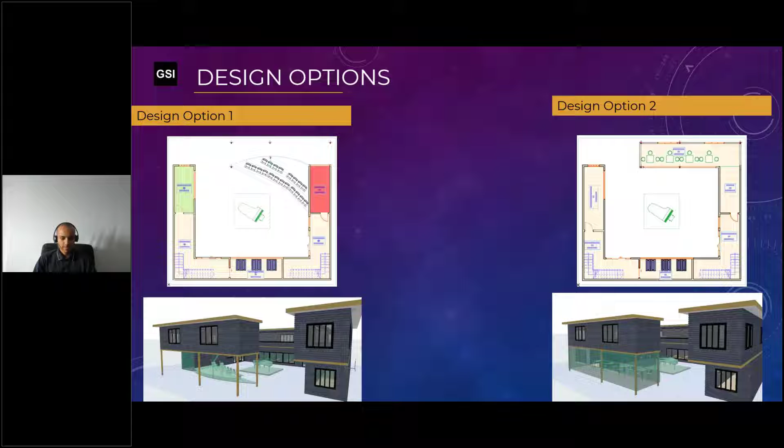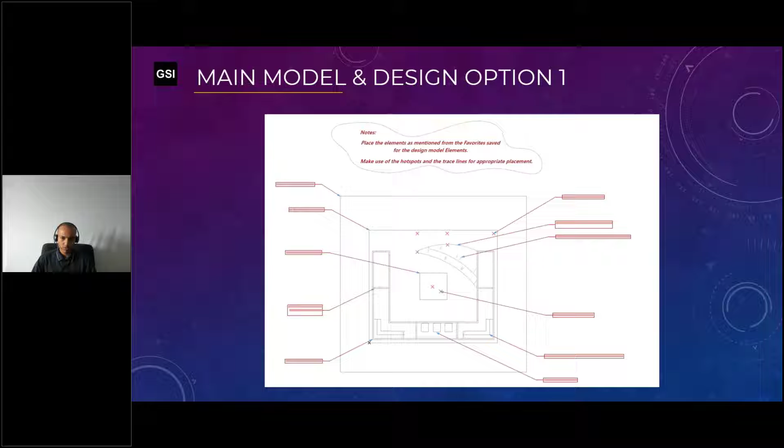With these two design options, we will try to see how to perform those design option sets, assign those elements in the proper design options, and model them one by one. Moving on to the next slide, we have this trace that I created for the webinar. You can see there's a trace option, and I'll now move on to the Graphisoft interface of Archicad.

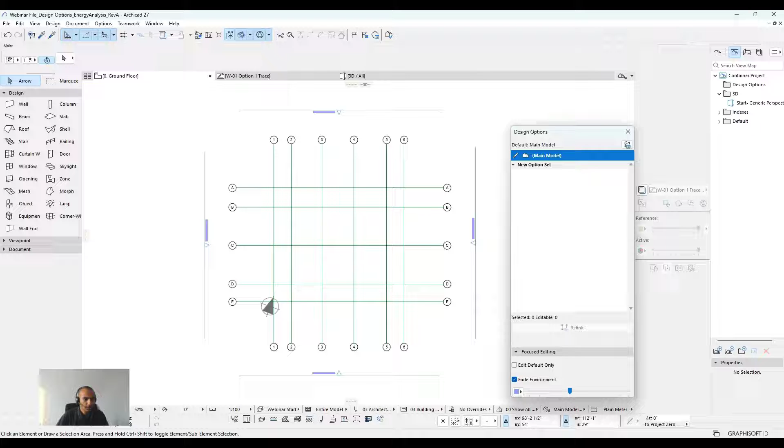So now we are in the Archicad interface. Before we begin, I'd like to show you where the design option palette is. If you go to Window and Palettes, there's the Design Option palette. Click that, and you can adjust it, put it wherever you want.

Once that's done, we'll create the design option combinations and the design option sets. In the combinations, I'll add one: option 1 plus the main model, and another one will be option 2 plus main model.

In the option 1 plus main model combination, we will add option 1, which will be turned on, and option 2 off. But in the option 2 plus main model combination, we'll have option 2 turned on. Once you cycle through those, it cycles over here as well - option 1, and option 2 plus main model, option 2, right? Once that's set, you can press OK.

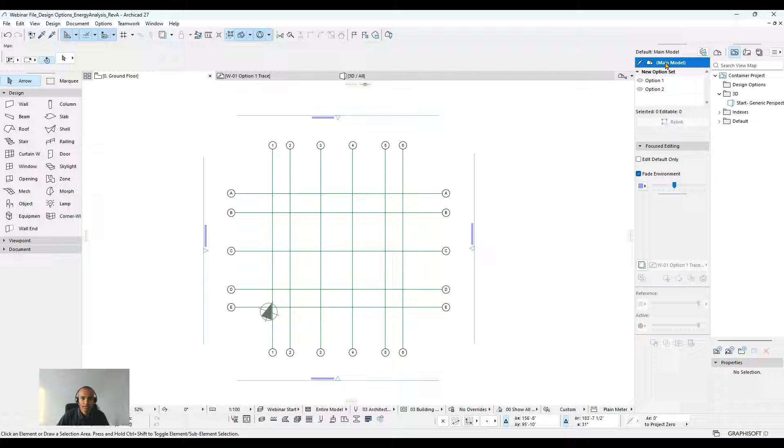For now, we won't be working with option 1 or option 2. We'll just focus on the main model. So I turn these off and put this on the main model. Now I can use...

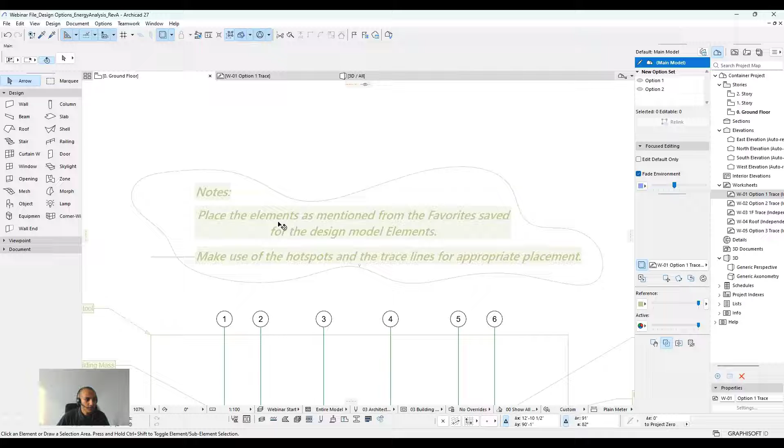...my worksheet where I saved the trace for us to quickly model the building. As you can see, I've put down some notes where I'll be using elements from the favorites saved in this project file, and design the model elements using those favorites. We'll also use the hotspots and trace lines for appropriate placements, which will be quick.

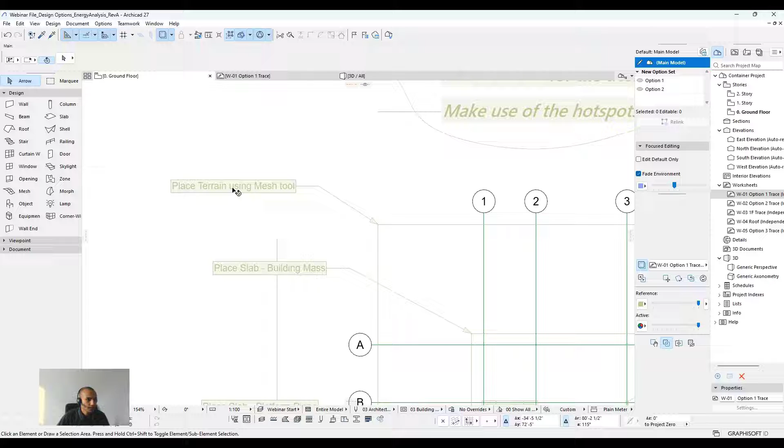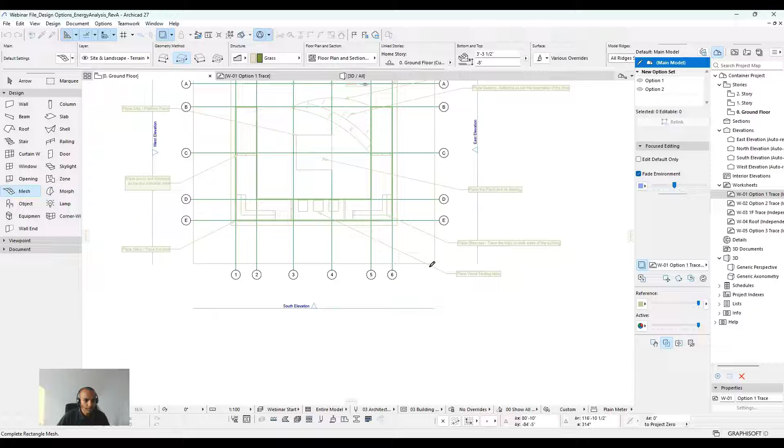So if I start from the terrain here using the mesh tool, which is over here at the Design tab - you can see there's a mesh tool. You click that, and from this dropdown arrow there's the favorites folder. I've set up the webinar terrain, and it will quickly give me the terrain with the settings already set.

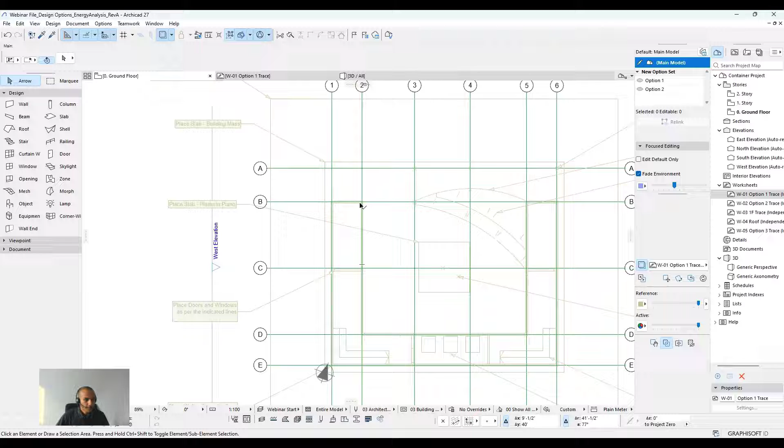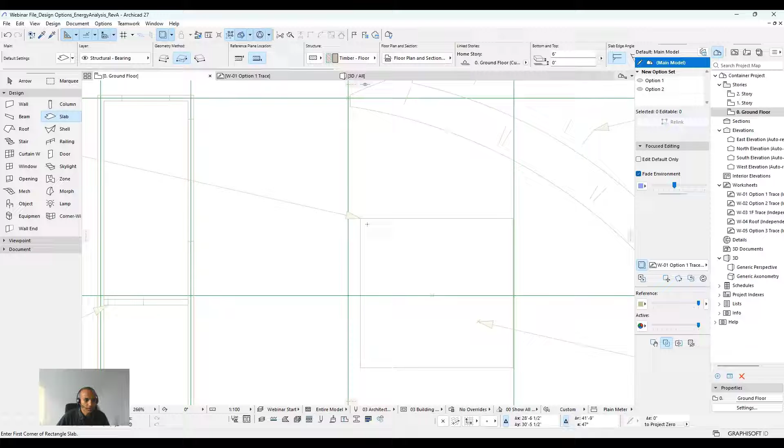So I placed the terrain, placed the slab with the building mass right here, and we'll use the rectangular option again. That's the mesh tool and the slab tool - you can see it's placed really nice. Going back to the ground floor, we'll also put the platform for the piano using the slab tool. Double click that, one click, next click place, go to 3D, check it out. Yeah, it's right there.

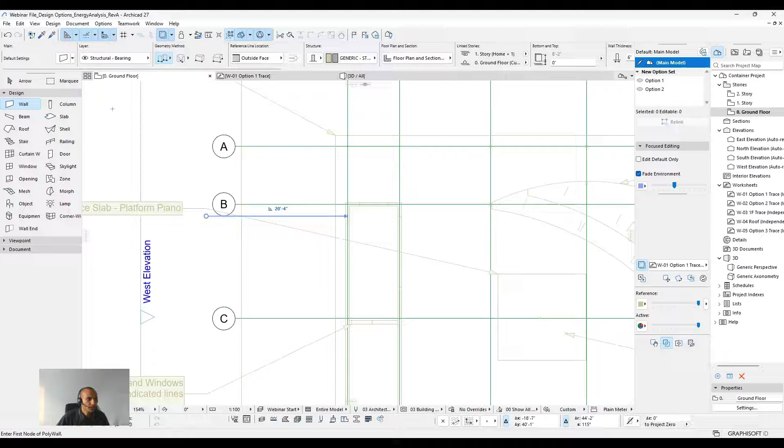Now we will be placing some of these walls. To do that, I'll go to the Wall tab right here and use the wall container to place these exterior walls, one by one.

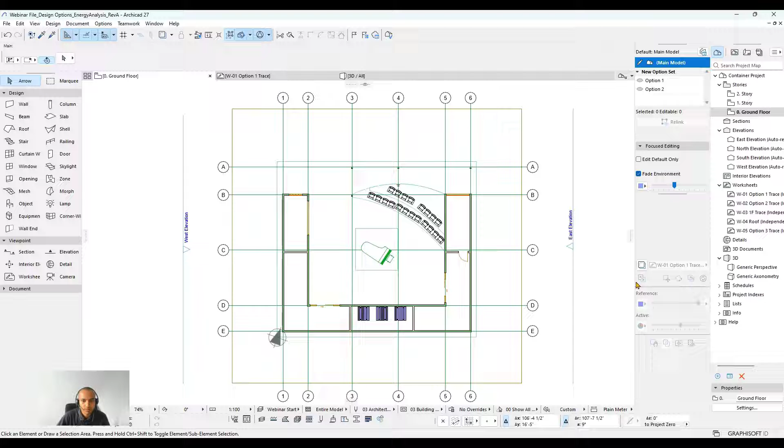And for option 2, we have the other trace map right here, which will be this one. We'll have to first assign the elements to the correct option so that the main model is shifted towards option 1, and we can add more to option 2, right?

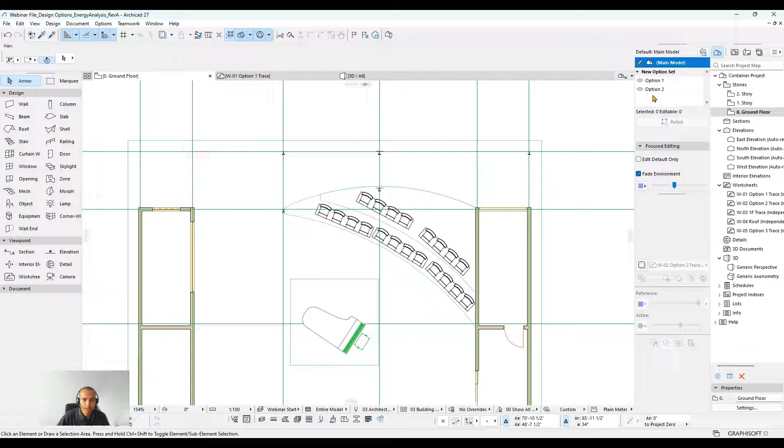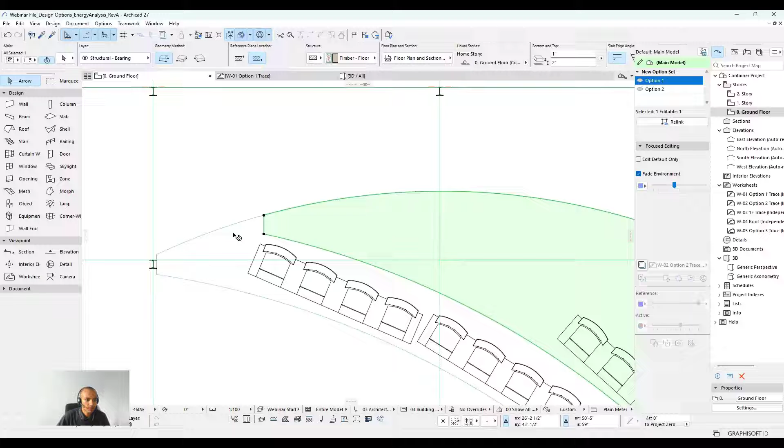So to do that, it's simple - we select option 1 here and get the elements that are going to be in option 1. Such as this, we'll relink to that option right here. We'll relink that to option 1. Relink this, the audience seating, to option 1, and slowly it's going to disappear because we have option 1 powered off.

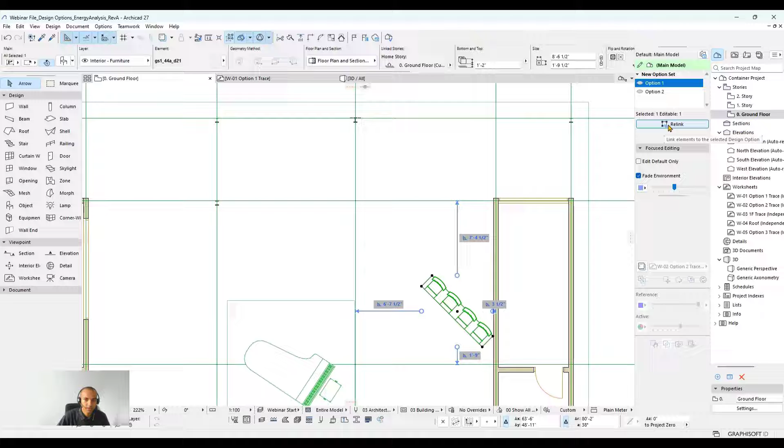The icon is powered off, so the elements are getting hidden while we relink them with option 1. So that's that.

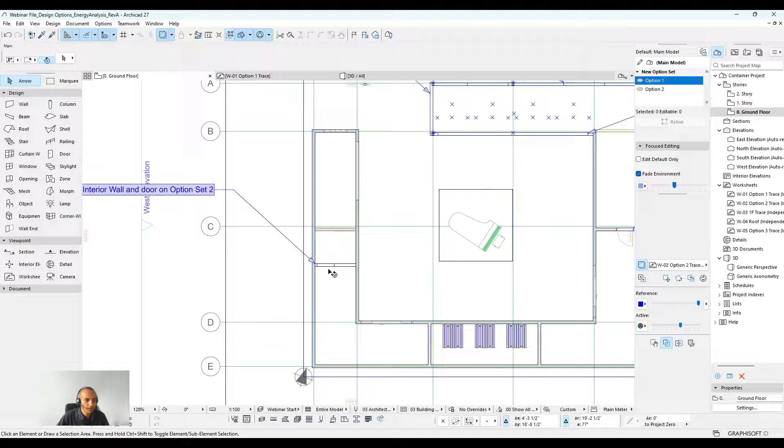Let's hide these and keep these columns there, because in option 2 the columns are there too, so they're going to be on the main model. The only new things we have are this set of walls and the furniture over here. The rest, on the interior side, there's a wall shift towards this side, so that means this is option 1 as well.

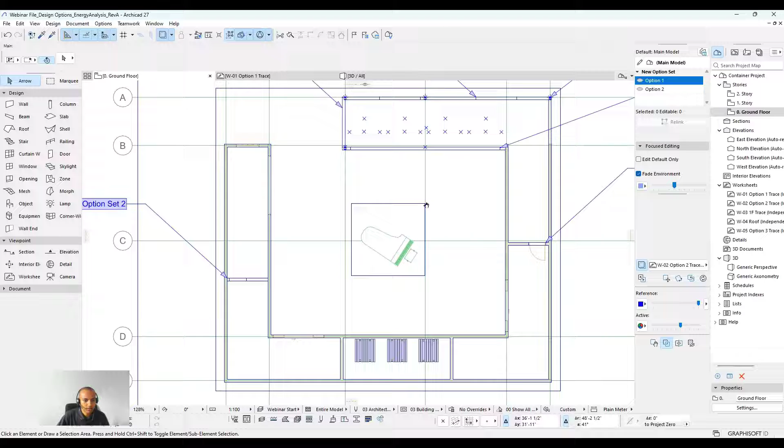And if we check that, this door here will also be in option 1. We have an open space here, so it's that, and everything else is the main model. So now let's put things on the option 2 side.

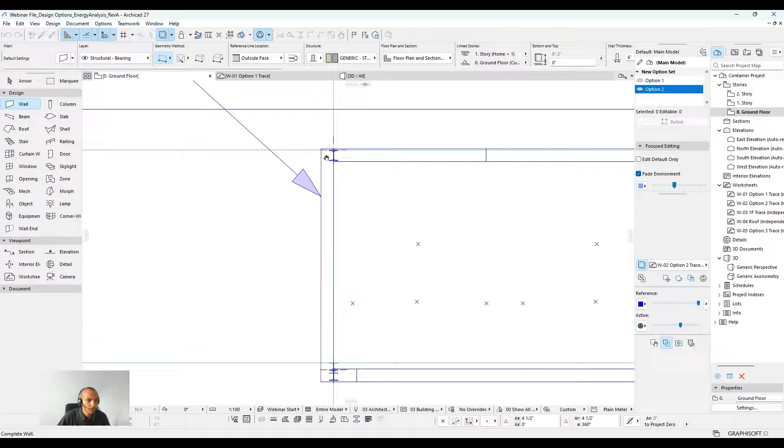On option 2, we have the walls we created with the same wall tool. And as you can see, these walls are going to be in option 2, which is this one. So we highlight this, relink that, it will disappear.

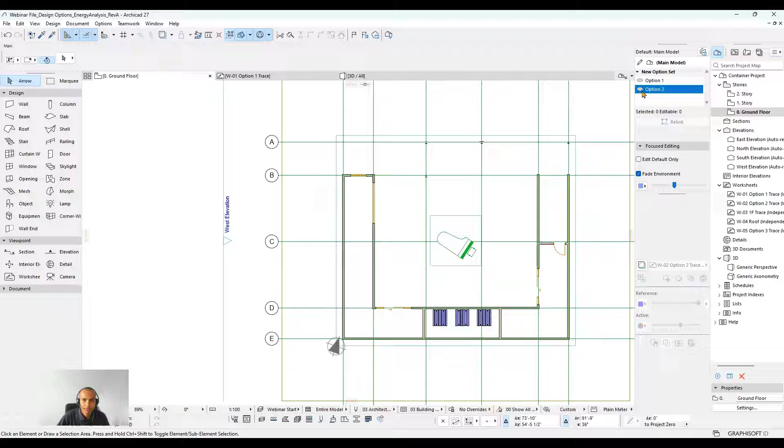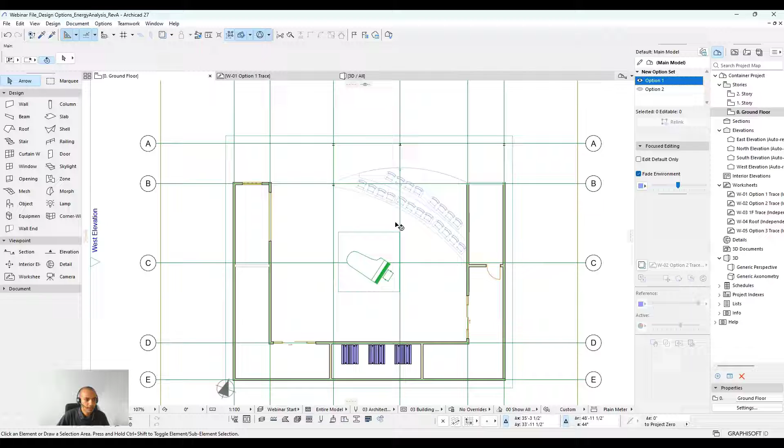As you can see, only the main model is visible because we have turned off option 1 and option 2. So if you start turning them on, you can visualize option 1 right here and option 2 right here. So it sort of changes, and that's how it's done. It's quite easy to fix.

So for option 2, I'm missing this internal wall right here, you can see that. So if I place that and assign it to option 2, it's going to be fixed for the option 2 set.

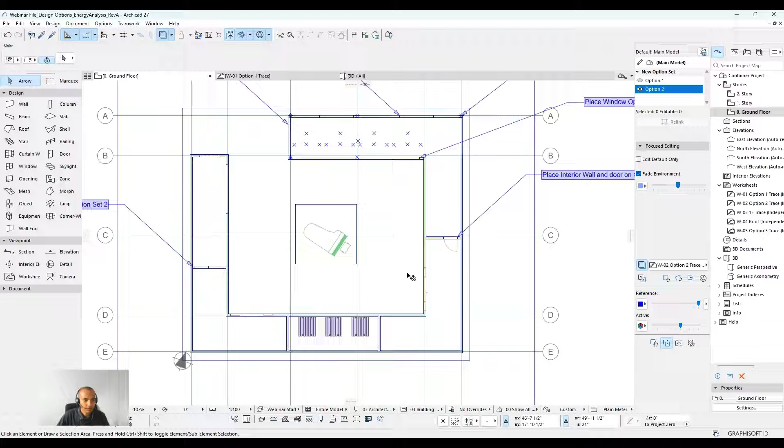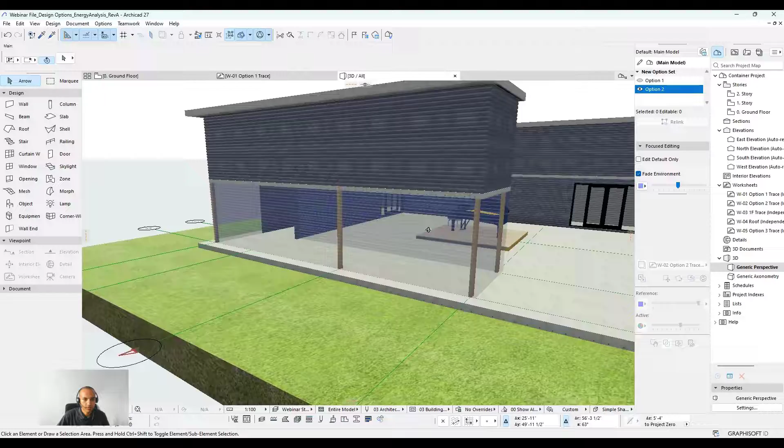And now when we go towards 3D and turn on option 1, you can see the highlighted part. And if we turn on option 2, you can see the walls coming out, right? And it's that simple.

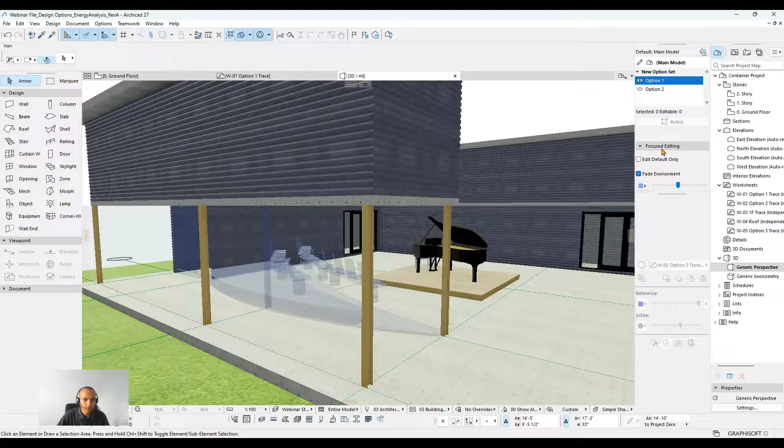So if we try to visualize it in a normal texture, we can use the focused editing settings, which we're also going to talk about in this webinar. So if we use the focused editing settings, we can change this color to the original one so that it will give you the original graphics.

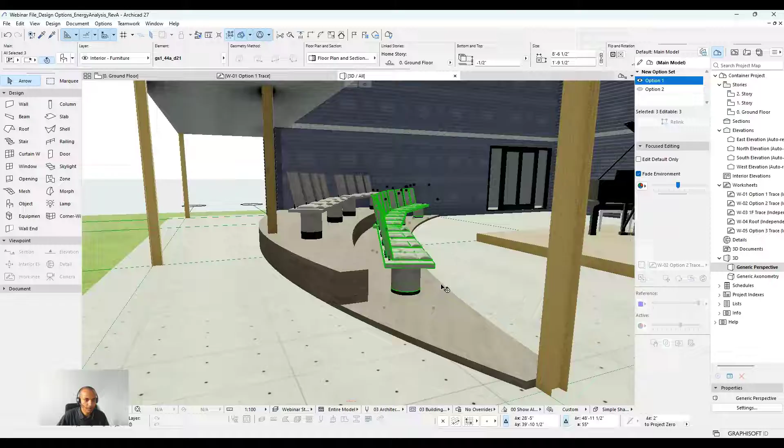And so you can see if we cycle to option 2, it's going to create that wall for us. And here I would want to show and give some time for the design option manager.

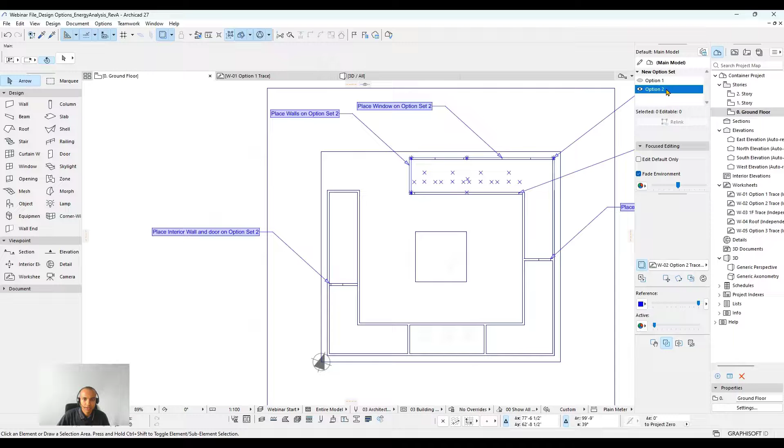So to cycle that, I also have these settings that I would like to show you, sort of saving those views, ground floor views for each option. So, save as view, custom.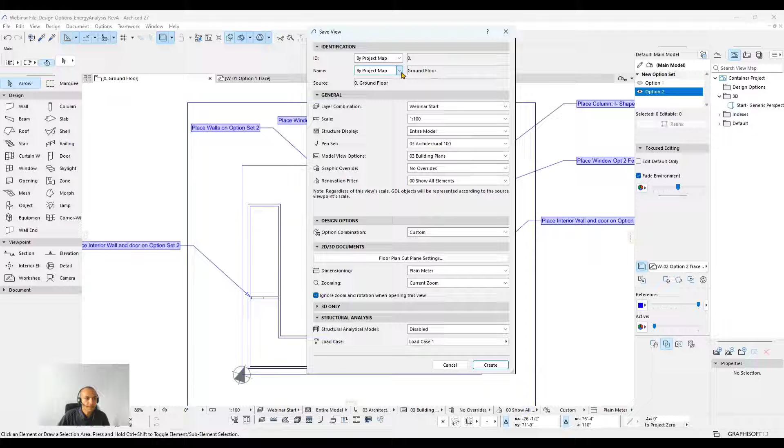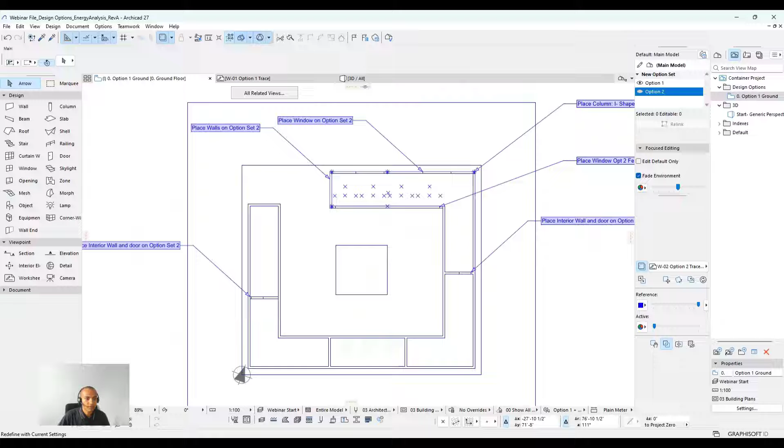So this is going to be option 1, ground. Create that, put it inside the design options. It will house option 1 and the main model. I'll just redefine this, close that.

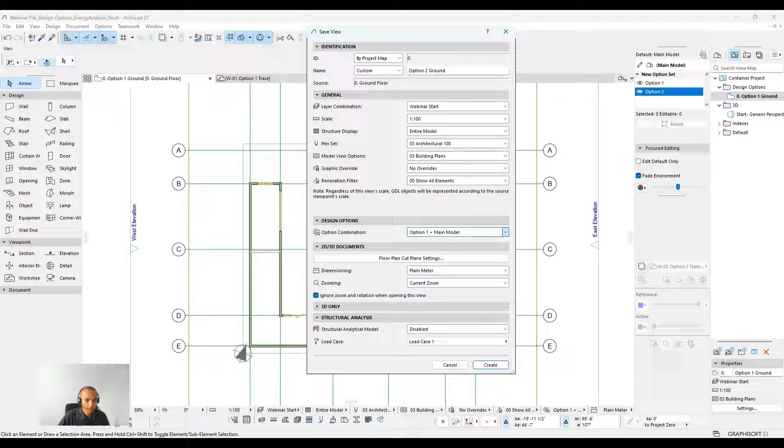And again I'll save a new view, which is going to be option 2 Ground, and we'll keep this as option 2 plus main model. Create that, and we have it over here now.

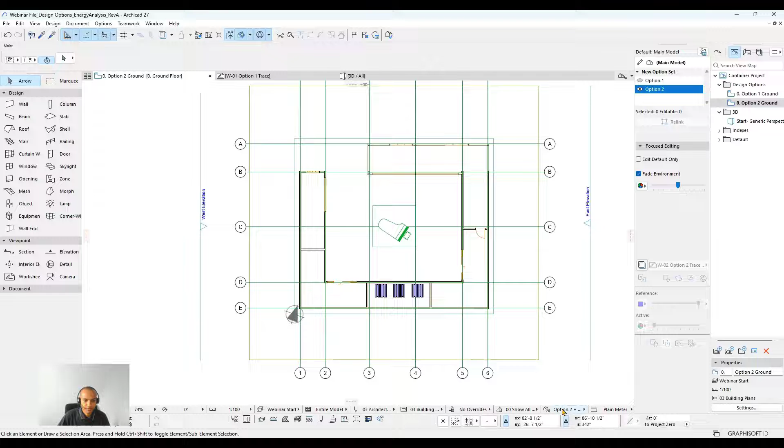So once we created the views, we can cycle through option 1 and option 2 quickly, as you can see. Making use of the design option manager and saving these to the view map will give you a quick overview of your options, option 1, option 2. So there we have it.

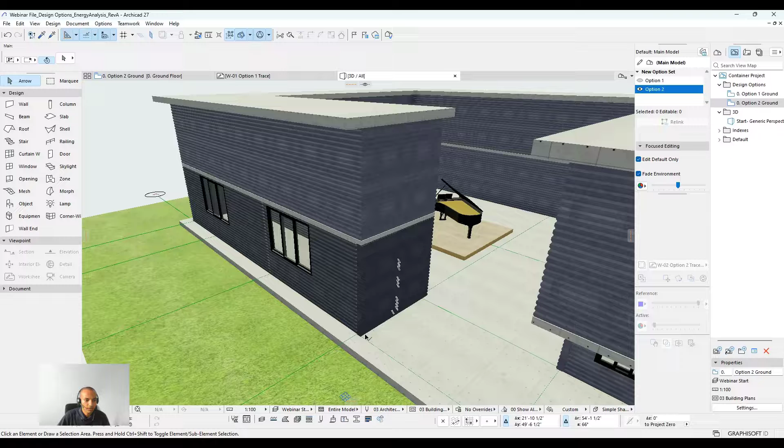That easy. And I would also like to add, on focused editing, there's an option called edit default only. When that's turned on, you are not able to select or edit the elements that belong to option 2, which is highlighted right now. If edit default only is turned off, then you are able to select these elements and edit them. So this is the feature for the focused editing part. If you turn that on and off, you cycle through being able to edit them or not.

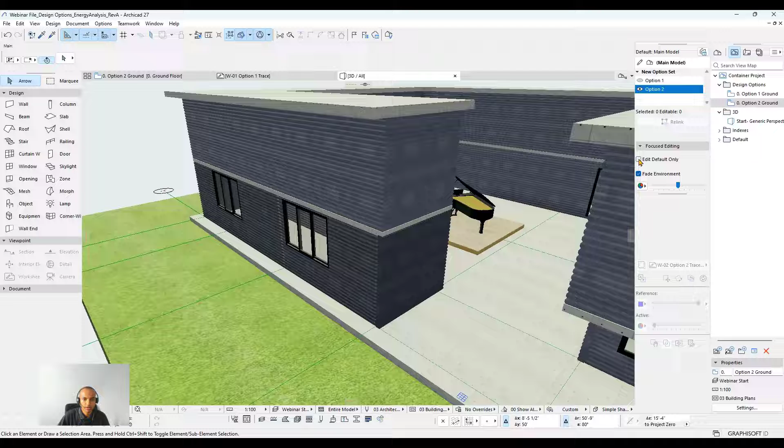And the fade environment is just about fading your options out. So you can use the original color or use certain different colors that you like to have. You can also use custom colors to highlight your options.